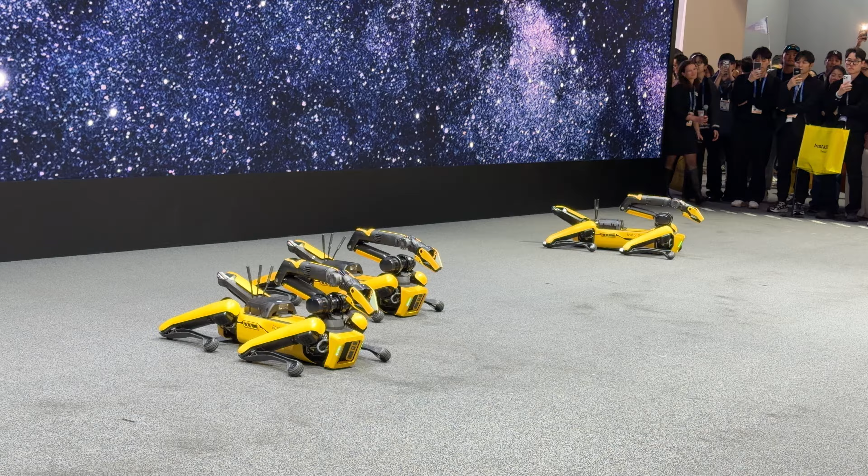Great job, it never gets old. Give it up for our dancing Spot here.

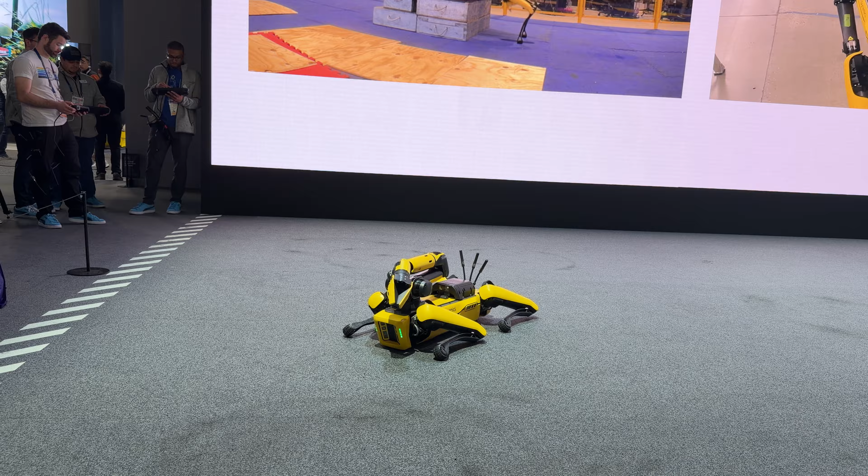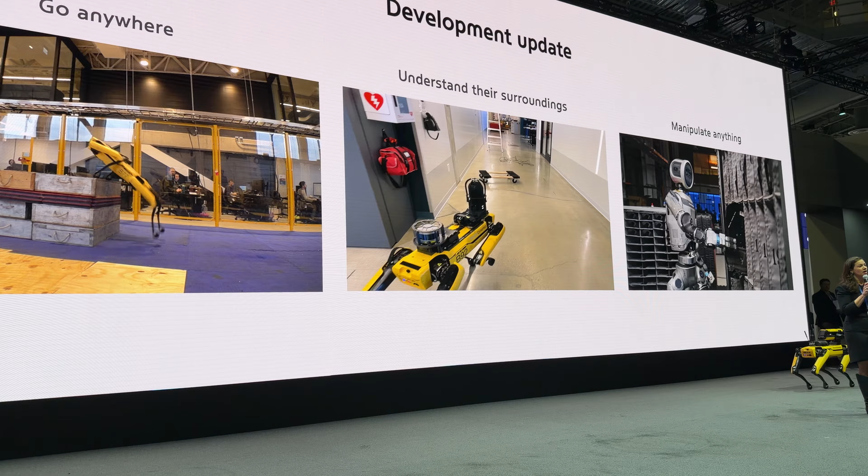In terms of being able to understand their surroundings, we're making great progress on that with AI. In the video behind me, you can see Spot is able to understand a pile of wires on the floor that it should not step into. And it goes around a ladder, keeping people safe in all kinds of different environments.

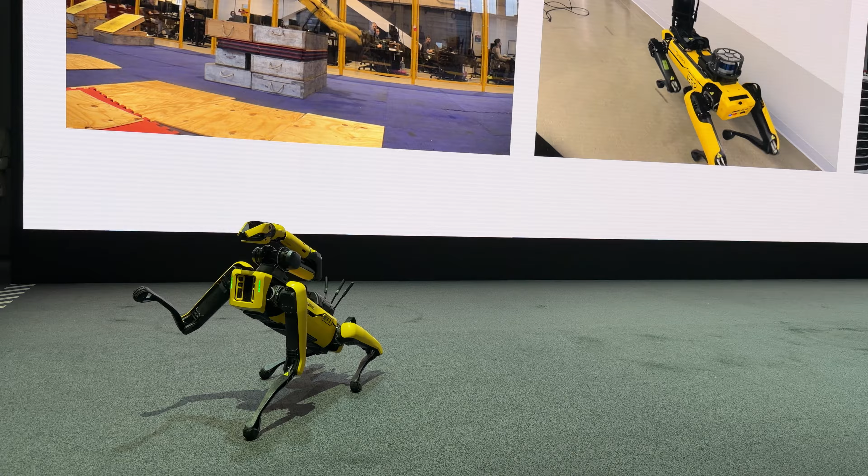Now, manipulating and interacting with the world is really what we're so excited about, and where all the promise and hype is around humanoids. Because robots like Atlas behind you with grippers and robots like Spot with grippers are going to be able to interact and manipulate the world, and that is advancing rapidly with AI.

When we think about robots, it's not just about the technical capabilities that they have, but really 4 different pillars that make robots successful in many different functions. The first is dependability. Robots need to be able to get up every day and do a task again and again. They need to be reliable.

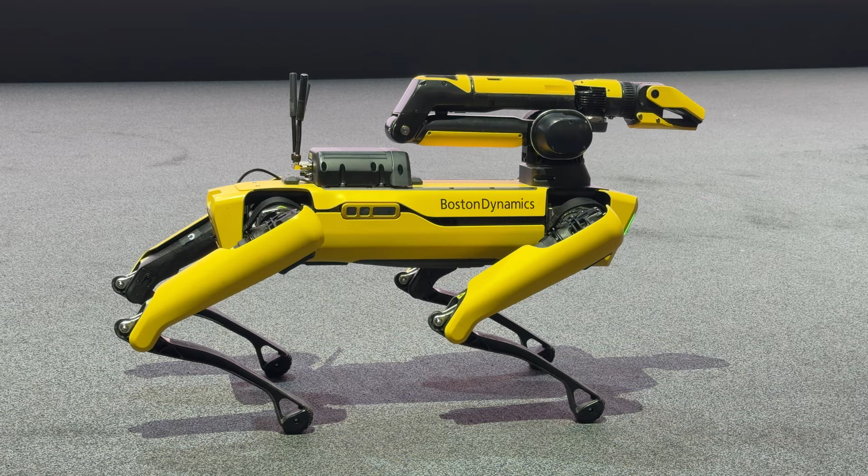They also need to be safe. You'll hear us talk a lot today about how we build our robots with safety systems in them, and how we think about robots as a way to keep people safe. The third is that they have to drive value. Robots need to be able to deliver value as quickly as possible to make them successful.

And finally, the last one is they need to be able to use AI. And not just for AI's sake, but because with AI, we will be able to build more and more behaviors and capabilities, and we will be able to scale them reliably.

All 3 of our Boston Dynamics robots are built on those 4 pillars that I just talked about. We have, of course, Spot showing off for you today, our agile quadruped robot. We have Atlas behind you, the world's most advanced humanoid. And then we have Stretch, which is our warehouse and logistics robot. I'm going to spend today talking to you a little bit about Spot and the work it's doing out in the real world.

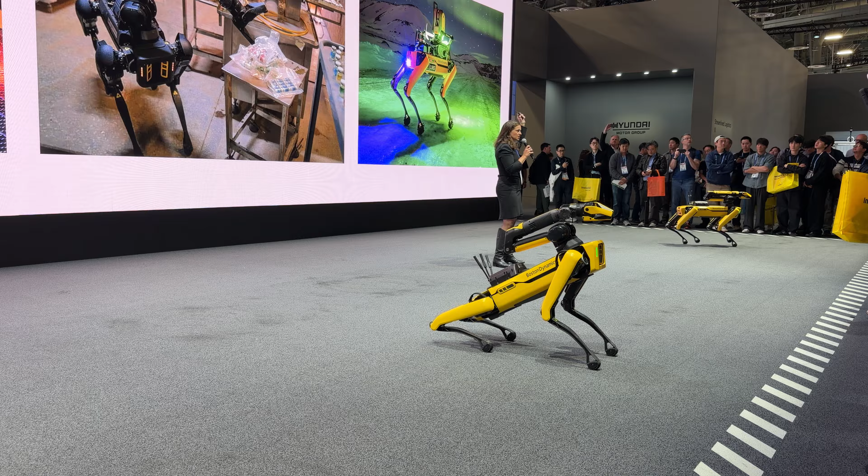Today we have thousands of these Spot robots in many different industries and use cases around the world. The first is that Spot is an autonomous data collection tool. It works in facilities to gather information about different assets and products within that facility to alert human companions if anything is wrong. It's able to collect data to build digital twins.

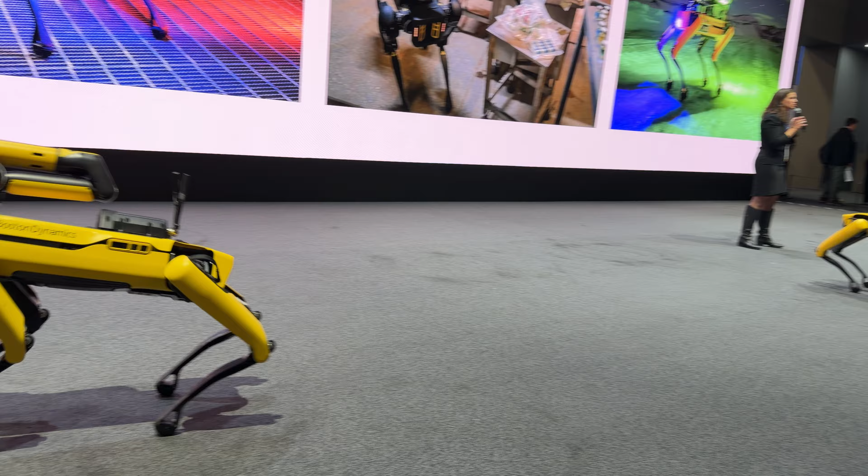Second, Spot is able to be used by first responders for things like explosive ordnance disposal, or investigating a suspicious package, or going in for incident response. In those situations, Spot is oftentimes controlled by a tablet. It's teleoperated, just as our lovely group over here is doing for you today.

And then finally, Spot is a platform. It's built with researchers in mind. Researchers all over the world are using Spot, our open APIs, and our developer tools to build additional capabilities on top of the robot, making sure that Spot is continuing to learn all the time.

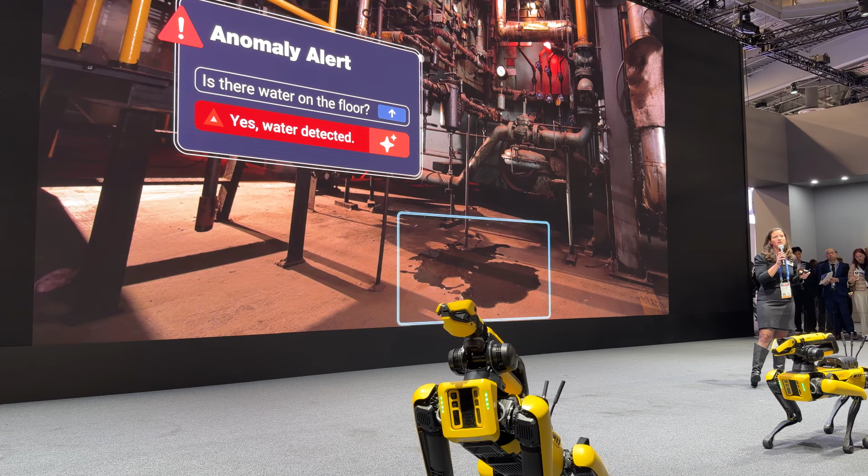Now, we love a robot video here at Boston Dynamics, so I thought what better way to talk about what Spot is doing than show you. Here behind me, you'll see the robot autonomously navigating its environment. It was taught where to go and what to look for, and then it gets off and it runs that mission over and over again. It's collecting data from all kinds of different sensors equipped on the back of the robot, which we'll talk about in just a little bit. It's able to collect a digital catalog of all kinds of information across the site, as well as a visual, auditable history about what the robot is seeing.

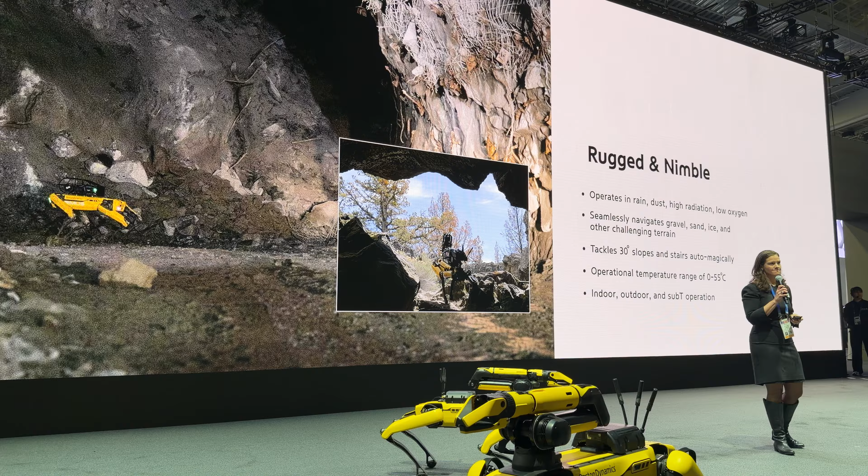As it's walking around these sites autonomously, it needs to be able to do it very well without human interaction. Spot was really built from the ground up to be able to do that.

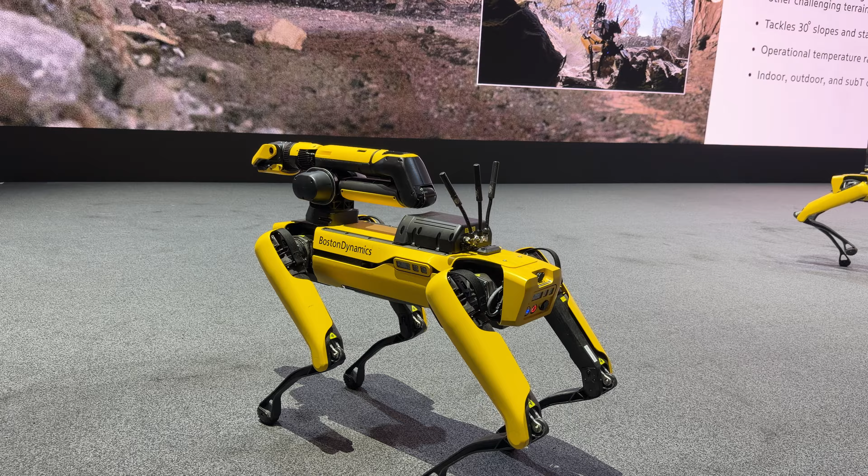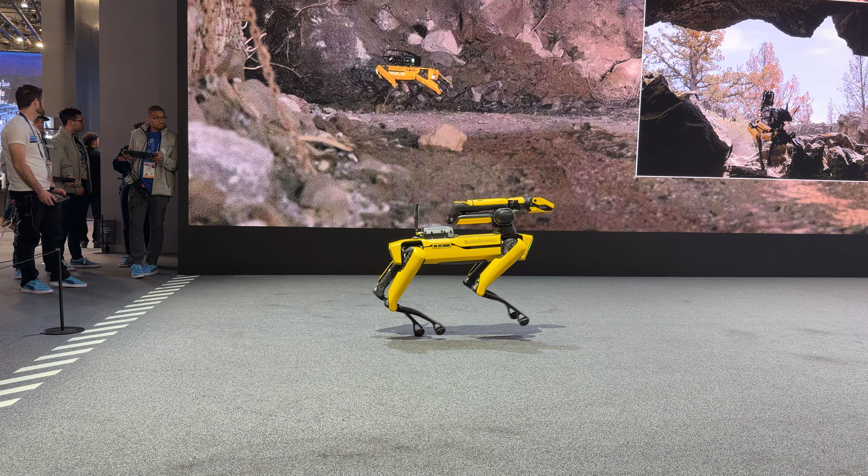When you're controlling Spot with a tablet or sending it on a mission, it knows what to do. When it sees a stair, Spot walks up it. It knows what a stair is—you don't have to tell it. When it's walking on uneven ground, or it sees rocks in its way, Spot can walk over them as it's going about its day-to-day routine.

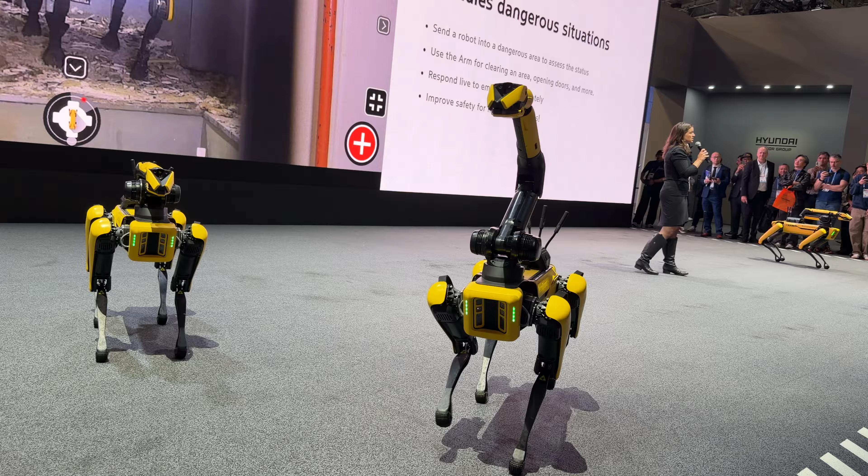That ability is important in industrial environments, but it's extremely important in dangerous environments that Spot is often in. The picture behind me might not seem that interesting, but it's actually the tablet view of Spot in an irradiated area in Fukushima Daiichi, where Spot is being used as part of the efforts to explore the area and go places humans have never been before. It's keeping people out of harm's way, and it's collecting invaluable data for the teams there to learn more about what they're seeing.

Spot has to collect all kinds of information and useful data about its world. Because it's a robot, it can collect that same piece of information over and over again. It's reliable, it's high quality, and it's easy to scale. That is the type of data we are going to need to power the AI engines of the future. Spot is an excellent tool in collecting that data.

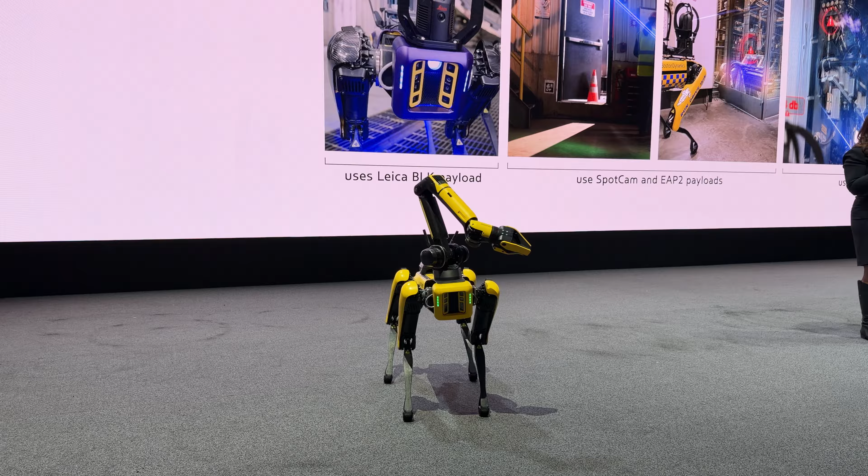We've been talking a lot about this collection, and Spot is able to do that with a suite of sensors that you can see on the robot going up and down the stairs, and also displayed behind me here. We gave Spot human capabilities and superhuman capabilities.

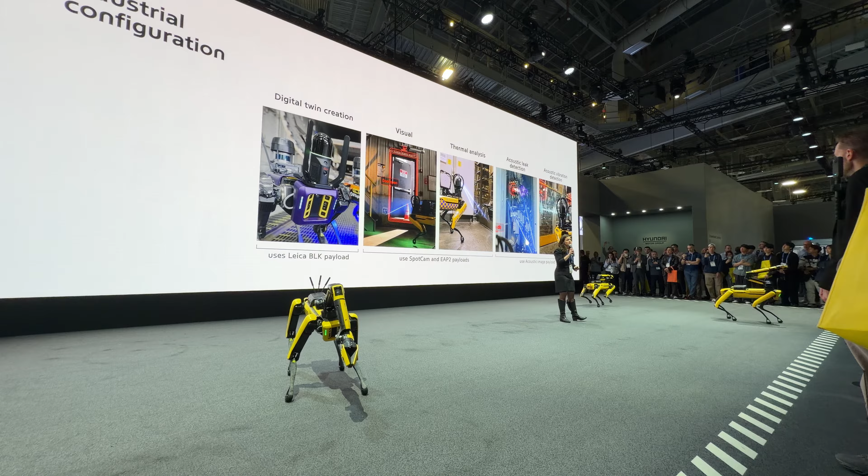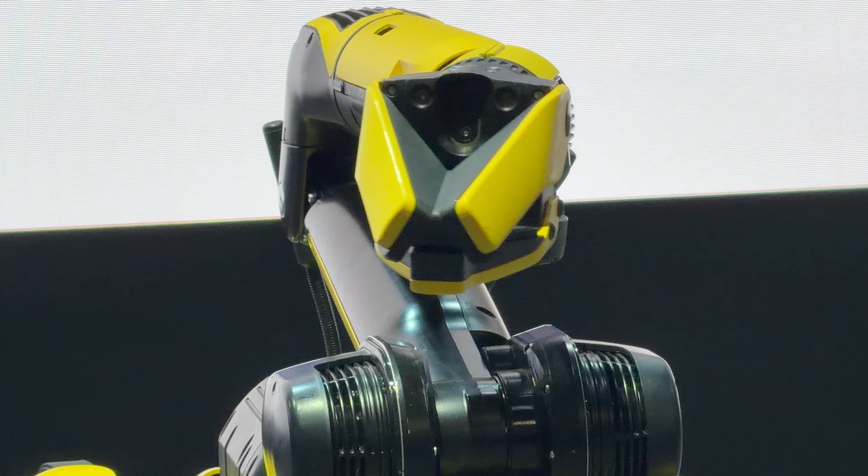It's able to take high-definition RGB photos. It can take 360-degree panoramic images of a site. It's also able to take thermal captures, so it can take a picture of a motor or pump and see it start to overheat, alerting a human companion that something might be going wrong before anything bad happens. Spot also has superhuman hearing.

It's listening for things like leaks in compressed air and gas lines that run through all kinds of industrial sites—leaks that are expensive and lose a lot of energy. It's also listening for things like partial discharge, or motors and bearings that are vibrating, to know before they're going to fail.

All of those capabilities are even more exciting when you think about the promise of AI layered on top of them. You're able to tell Spot exactly what you want to look for—things like safety and security happening on a site. Spot can tell you when a door has been popped open, or when there might be a puddle or debris on the ground.

We have one customer who's a seed oil producer—they're using Spot to look for sunflower seeds on the ground. Now that's probably not useful to many of you, and that's not useful to a lot of our other customers. But because these tools are so flexible, you can tell Spot exactly what you want it to find and tune it to your site.

All of that rich data then gets sent to Orbit, which is Boston Dynamics' software platform for all of its robots. Orbit is a fully featured application where you can manage your fleet of robots and analyze your data. We have many customers who don't just have one or two Spots, but 5, 10, 20, 30 robots that they are managing with Orbit.

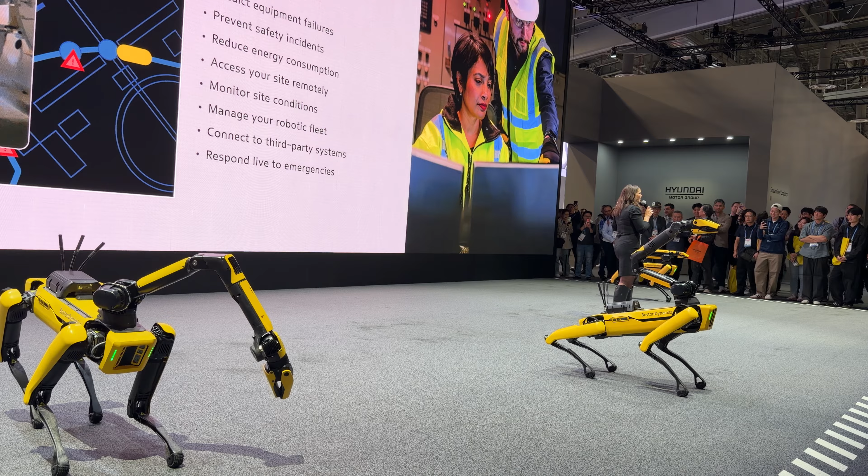It's also going to be the home for Stretch and Atlas applications in the future. So when you start with Spot and Orbit today in general purpose robot deployment, you're well on your way to getting started with Atlas in the future.

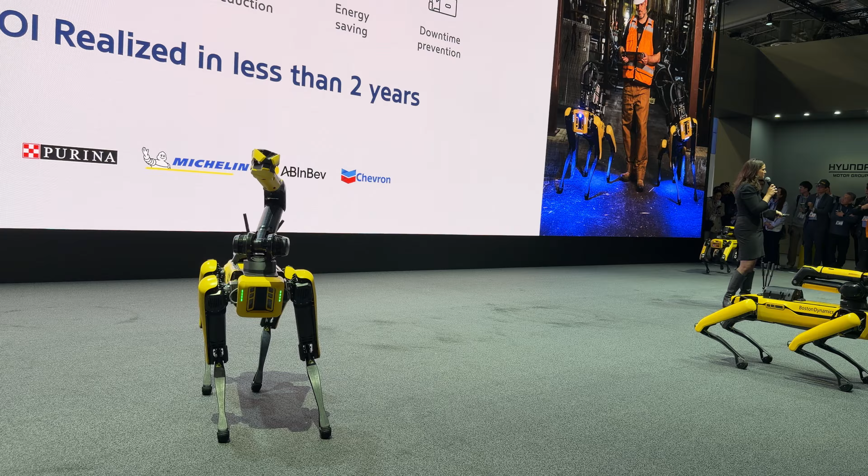Now remember when I showed you earlier, we had those three pillars: dependability, safety, and value. Our customers are using Spot and Orbit today to get a return on investment in less than two years. They're doing that because Spot is telling them about equipment failures before they happen, preventing unplanned downtime.

They're able to save money and energy because of those leaks we talked about. And they're keeping people safe in all kinds of different ways, preventing them from doing tasks in hot and hard-to-reach places within their environments.

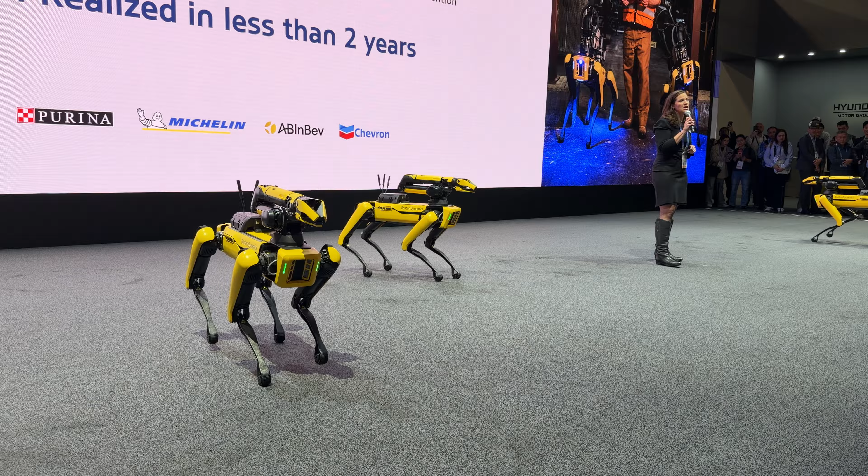And finally, the value of the data that Spot collected cannot be understated. It is being used to help our customers push their own AI roadmaps forward and accelerate them with their own data science and AI teams.

These robots have gained all kinds of capabilities and new behaviors over the past few years with the same hardware and software. They're only going to continue to get better with the promise of AI and all the amazing things around the world. So I'm so excited to share this with you today, and for the promise of tomorrow. What do you think, Spot?